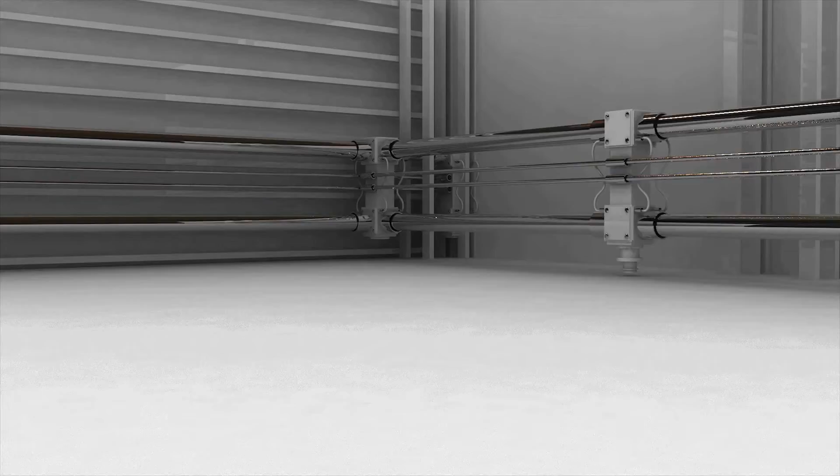So today we're going to be doing a very simple video on how you can do a beautiful detailed 3D carve. We're going to be covering the absolute basics that you need to do a wonderful 3D carving on some nice hardwood. We're going to keep this video pretty short and sweet. For most of you, this is going to be probably your first 3D carve, and this video is targeted towards people thinking about doing one for the first time. We're going to show you just how easy it is.

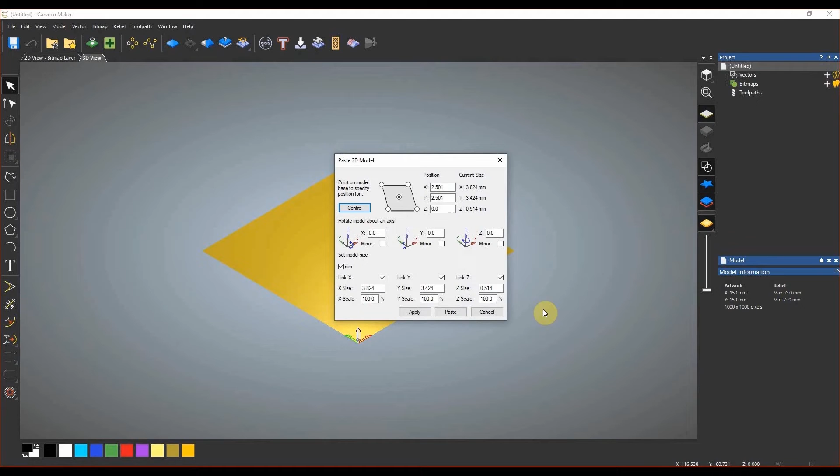Now in this first window that's popped up, as you can see on the left hand side, we don't have anything showing right now. So the first thing we need to do is get our model up to the surface, and set it to the size that we want it to be. By default on the right hand side, our X size is 3.8 mil, our Y is 3.4, and our height is 0.5 mil. So this is tiny. Let's just go ahead and make this 120, which has now automatically changed the Y and the Z to keep the scale.

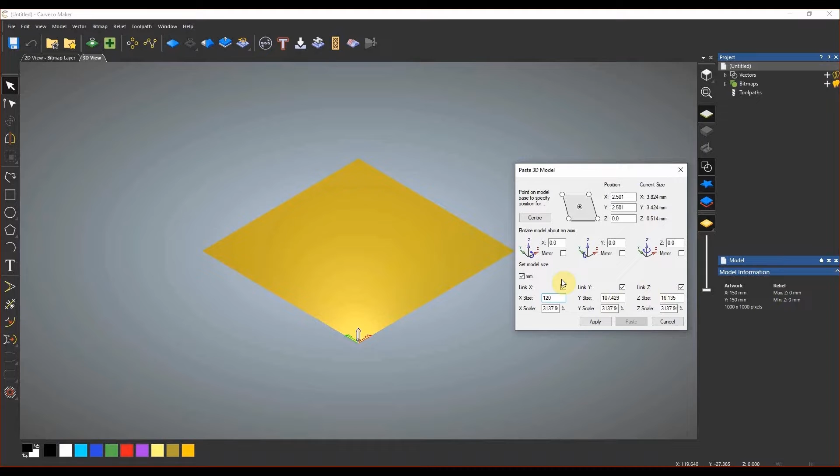So if we hit Apply now, you can see that our model is way below our canvas here. So we want to get it up on top on the surface. Let's just hit this center button, and then hit it again just to make sure it's going to go right on the surface.

Now if we wanted to, we could go ahead and do this 3D carve immediately just as it is. But instead, just to save a bit of time for the purposes of this video, we're going to decrease the height of this model a little bit, but still keep the overall dimensions. Carveco will actually squash this down for you, and the easiest way to do it is on the right hand side here, you've got this Link Z checkbox. We're just going to uncheck that, and reduce this down to 10 millimeters, just so it's a little bit more stout than it was originally.

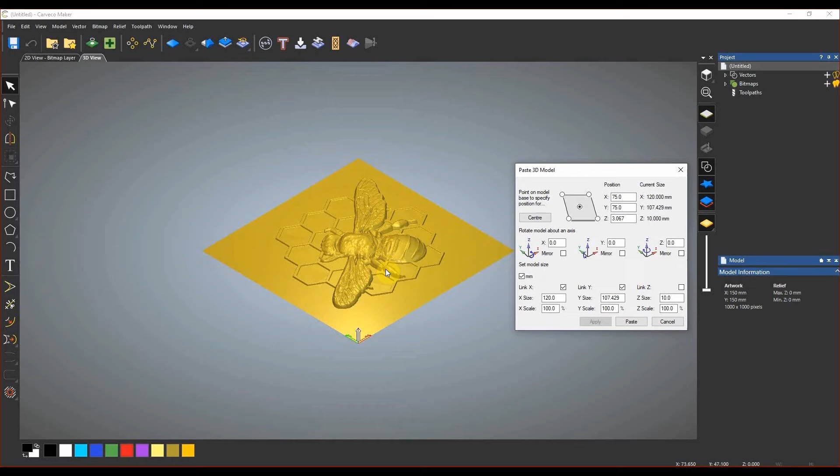Let's hit Apply, and as you can see, it's squashed down our overall STL. This is going to make for a much faster carve for the purposes of this video. So let's just hit the center button again just to make sure it's sitting right on top. Now that we're happy with this, just hit the Paste button here. Now if we close out of this window, we can see that we have our beautiful QueenBee model here on our canvas.

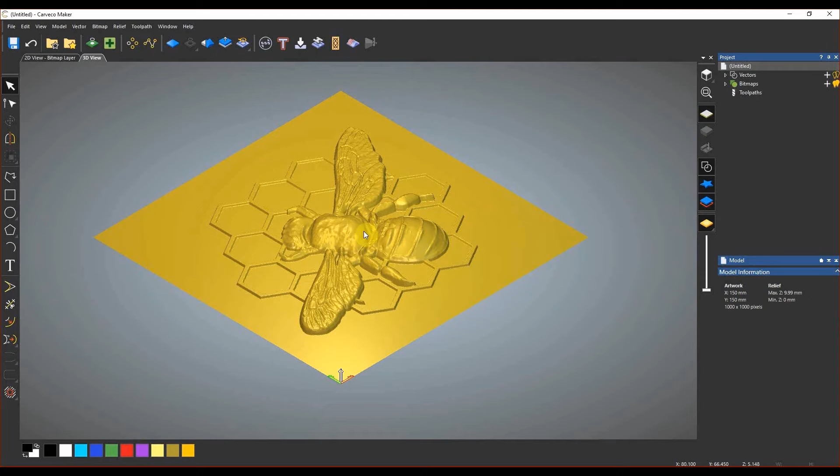Now just some quick navigation tips with Carveco. If you hold the mouse wheel in and move the mouse, you can rotate the model. If you hold the shift key while holding the mouse wheel in, you can actually drag the whole model around. And of course you can roll the mouse wheel to zoom in and out of the model.

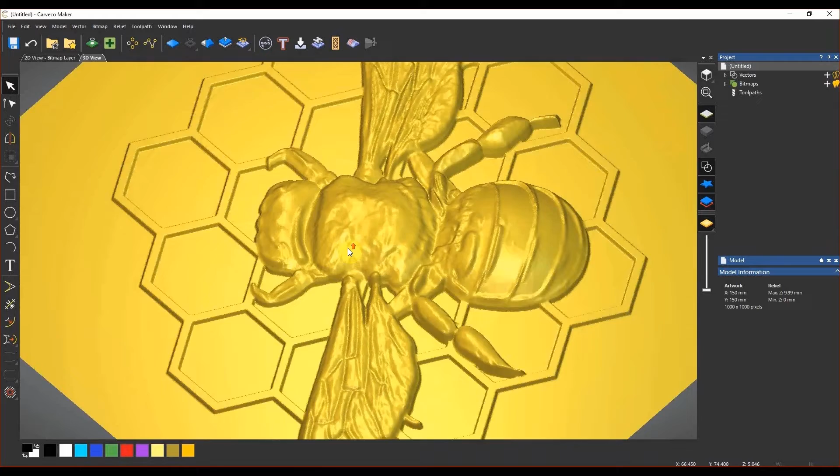So let's just go straight in and start doing this 3D carve. Now traditionally 3D carves are usually a two-step process. The first thing you would normally do is a roughing pass, and then the next step is to do a finishing pass where you use a really fine tool to get all of that beautiful detail out of your model.

So we're going to jump straight in now and set up our roughing pass. But what we're going to do, which is a little bit different, is create a little boundary around our model just so it really stands out when we go to do this carving. So the first thing we need to do is create a vector which will go around our 3D model. To do that, we go up the top to Vector, then Create, then Relief Boundary, and just hit Create Boundary on the right here.

Now you can see we've got this pink line traveling all the way around our model. So we are going to use this particular pink vector for our finishing pass. But now what we want to do is create a separate vector which we're going to use for our roughing pass, which is going to give us a little bit of a 5mm standoff from our actual carving and really make it stand out a lot more when we go to carve this.

So to do this now, we're going to keep this vector selected so it's still in pink, and go up the top to Vector again and then down to Offset. If we have a look on the right hand side here, it's opened up this window. Now we've already got an offset distance of 5mm in here, so we're going to keep this at 5mm and make sure we select outwards/right, and in here just hit Offset. As you can see now, it's created another pink vector that's traveling 5mm all the way around our actual model, and that is going to be a nice flat bottom that's going to accentuate our 3D model on our timber. So now that we've done that, we can close out of this window here.

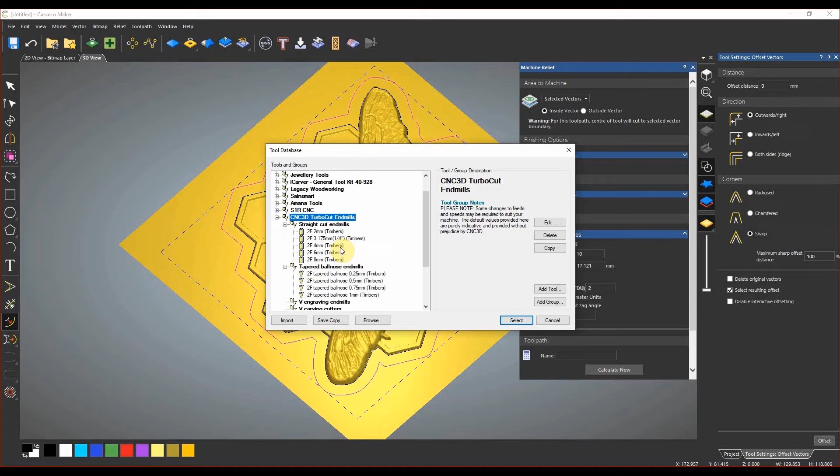So for this roughing pass, we're going to use a much larger end mill to remove the bulk of our material. We're going to use a 2-flute straight cut with 4mm cutting diameter, and you can leave the default settings of this for hardwood if you're using one of our QueenBee CNCs. We have tried our best to put some good feeds and speeds in there to make sure you guys have great carves.

If you are using, say for example, one of our U-carve CNCs, you may want to look at changing some of these values to decrease your depth of cut or width of cut. That will suit the U-carve a little bit better. But you can definitely do this on one of our U-carves too, it's just going to take you a little bit longer.

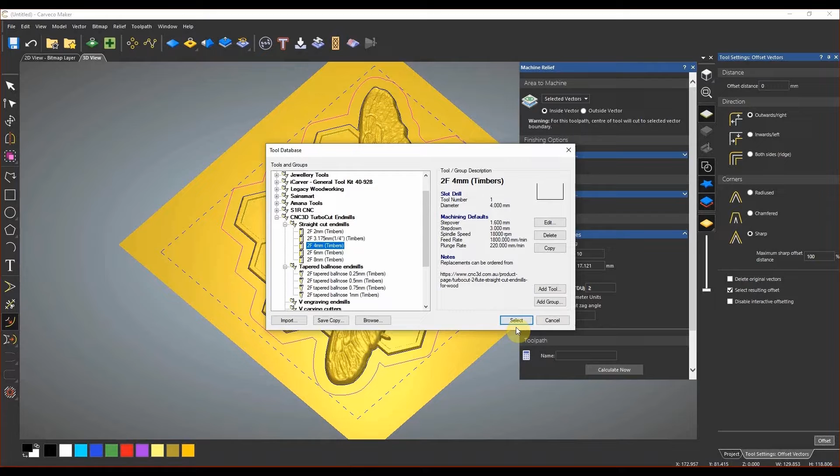So now that we've gone ahead and selected our 2-flute straight cut 4mm, just hit select. And if you look down here, you can see it's got a couple of default options that it wants to run through.

We're going to leave the standard raster here as our tool clearance strategy. We're going to let it automatically do our Z slices, and we are going to select ramping. You may not have this option ticked right now, but we're going to choose to add ramping because it leaves a better finish on your material as opposed to just plunging straight down into it. So leave that selected, and we're going to leave all the default settings that Carveco has selected. We're also going to leave our safe Z with what Carveco thinks is correct.

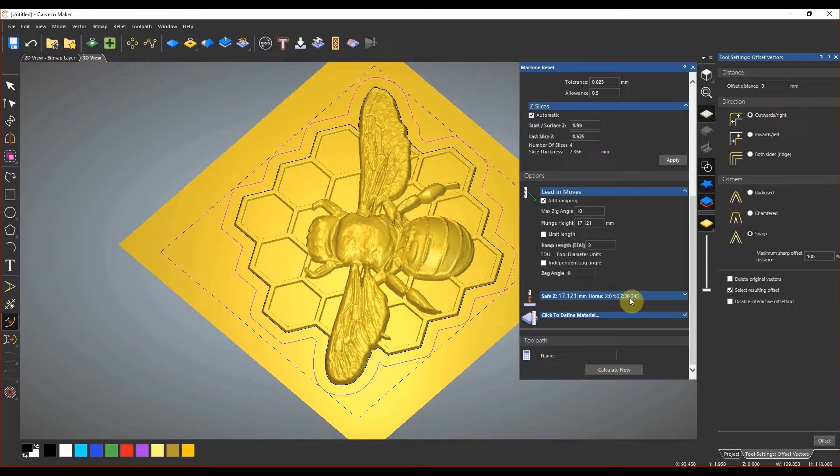The only other thing to do now is basically just to define our material. So let's click on this blue section, and as you can see, it has determined that the material thickness is 9.99 mil. Now this specifically relates to our 3D carving in general, but we actually want to tell it that we're using some 35 mil Australian hardwood here. So let's put 35 mil into this box.

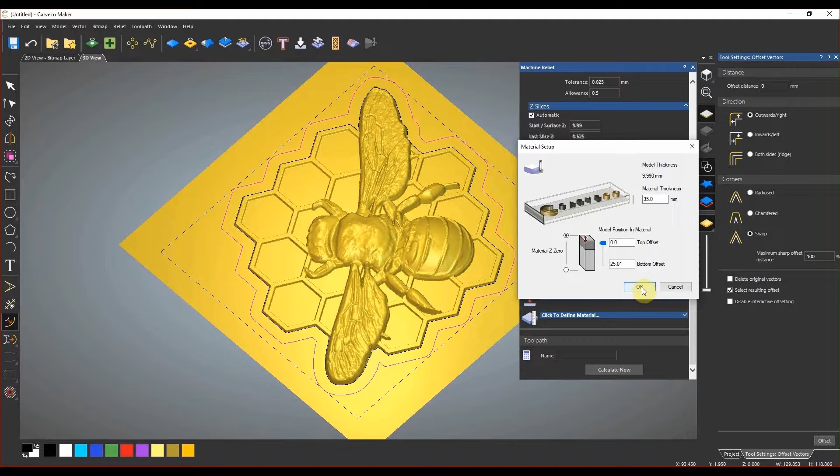Now, by default, it wants to set the model position right on the surface of the material, and we actually want that to happen because we don't want it to have to go all the way through this top section before it starts working on our model. So let's just bring our model all the way to the top, which is the default option, and click OK. Now, if we hold our mouse wheel down, we can see our material and where it's planning on putting our actual carving.

So now that we've gone ahead and done that, let's give this a name. We're going to call this roughing Bee. And let's just hit calculate now. And there you have it, it's created our toolpath that it's going to run for this 3D carve.

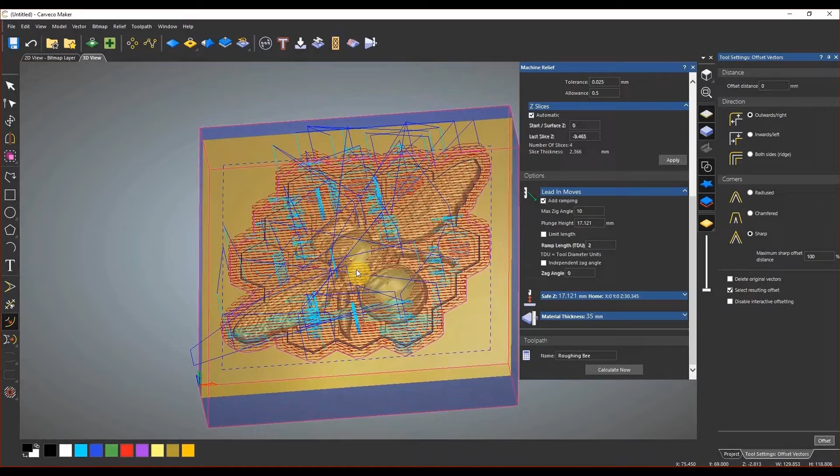So now we are basically just going to go to the right here where we've got our project tab, or we can choose to close out of this offset vectors window. So we'll close that. And if we now expand our toolpaths option here, you can see that we have our roughing Bee toolpath that we've just created.

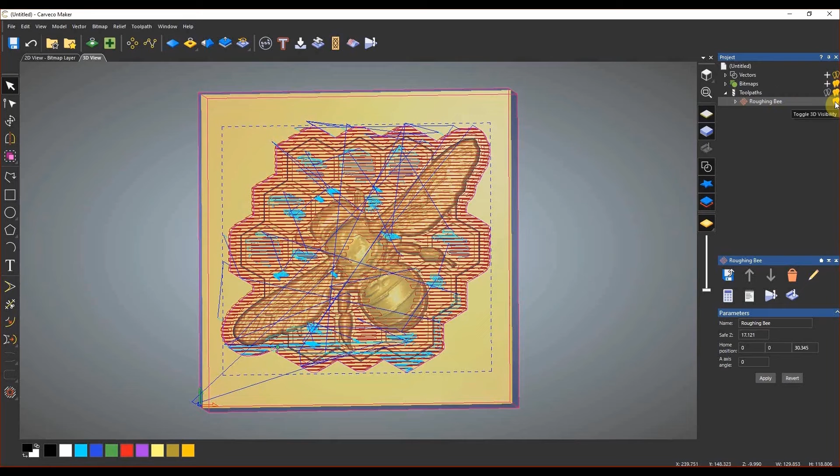So the next step from here is we're just going to close out of this machine relief window. And on the right hand side here, next to where we see roughing Bee, you'll see we've got these yellow lights. What we're going to do is just click on that, and that will actually hide our toolpath on the left hand side. If you click it again, then it will show the toolpath. So we're just going to hide that for a second.

Now, we've basically set up our roughing pass at this point in time, so it's pretty much good to go. The next step from here is we're going to now create another toolpath, which is just going to be for the finishing pass of our model. So what we need to do is just select our inner vector so that it's highlighted in pink. And we're basically going to follow the same procedure.

So we're going to go up the top to toolpath, and then go to new 3D toolpath, and then go to machine relief. And now what we want to do is we just want to add our finishing option. The first thing, of course, is we're just going to select selected vectors from this list to make sure it's only going to look at the actual model from within this pink boundary around our carving. So now all we need to do is choose a suitable end mill for doing a carve. Now, some of the best end mills to use are tapered ball nose end mills.

They will give you the best results when you're doing really detailed 3D carvings. Today we're going to be using a 0.5 mil 2-flute tapered ball nose end mill, so the very tip of this end mill is only 0.5 mil wide. By default, we set ours to have a 7% step over, meaning it will only travel over from the previous cut by 7%. This should give us quite a nice finish, but will add a little bit more time to our carving.

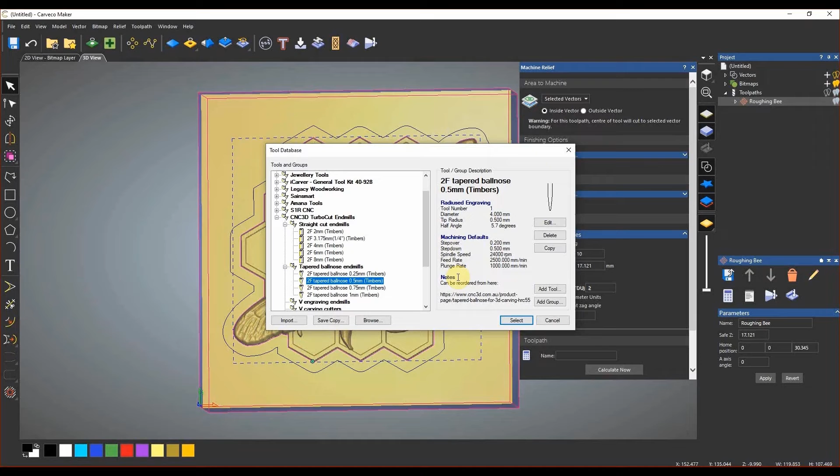But let's just select this one here. Now what we want to do is pretty much leave all of these settings exactly the same as before. So all we really need to do now is go down here, and let's call this finishing Bee, and then hit calculate now.

And there we go. It says 1 plunge could not be ramped. Do you still want to ramp this toolpath? This is entirely up to you if you wish to do this. As you can see based on the picture, it's pretty much going to do the whole thing for us, except for these 2 little areas here.

Now, we're going to say no to this in this case, and we're going to deselect ramping for the purposes of this actual carve. The reason why is we don't want it to miss any little bits and pieces as it goes through this carve. So in this case where it's given us this alert, let's just untick add ramping and hit calculate now. And so now that's gone through and it's accepted that one.

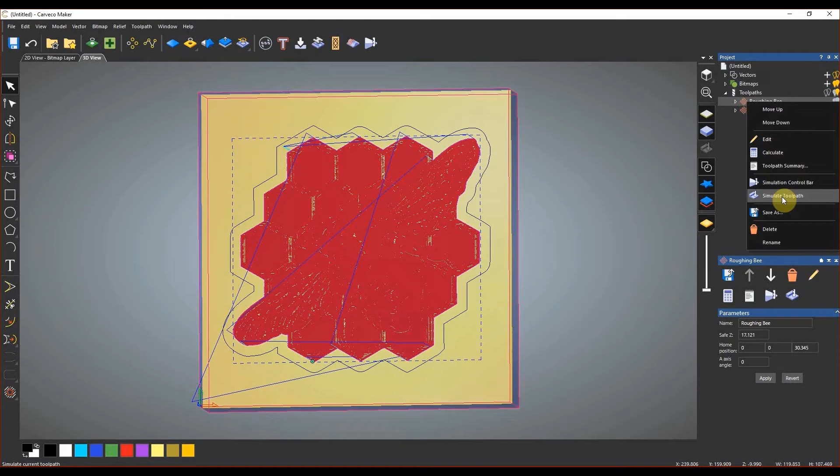Now if we look on the right hand side, we can now see our finishing bee toolpath here. If you want to, you can actually go and view these as well. The best way to do that, for example with our roughing bee, we'll have a look at that one first. So if we right click on roughing bee, we can go to simulate toolpath. And if you have a look here, it's given us a visual representation of how our actual carve will look after it completes the roughing pass.

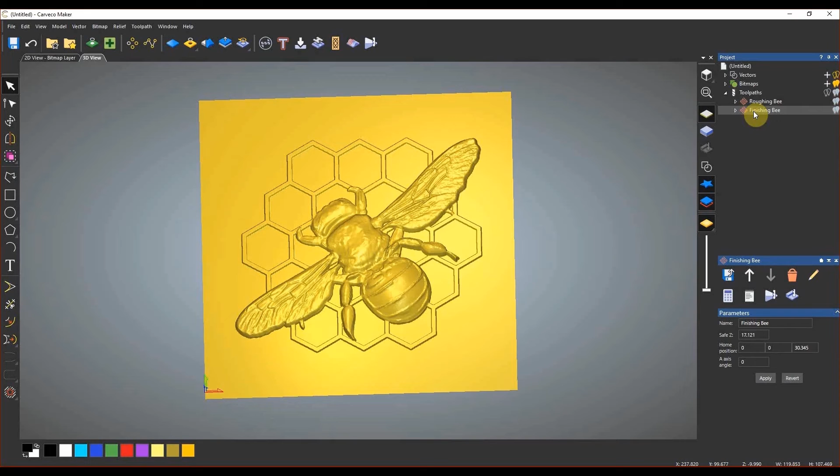Now, if you want to do the same thing with the finishing pass, it works the same way. We're just going to right click on this simulation and go delete. Then we're going to right click on our finishing bee toolpath here and just go simulate. And if you have a look now, that definitely looks a lot more like our 3D carving and what we would expect it to come out like. So it's looking pretty good. We're pretty much ready to go ahead and export these now and get them loaded onto our Nighthawk.

So the first thing we'll do is export our roughing bee toolpath. We're going to right click on it and go save as. As you can see here on the right hand side, it says toolpaths to save. There's our roughing bee. We're going to save it in this folder, which is C users David OneDrive desktop Bee, and we're going to call it roughing bee.

Now for the machine file format, if you're using a CNC3D Nighthawk controller, we definitely recommend selecting this CNC3D Nighthawk post-processor. This one will be available in the next release of Carveco, but we'll also include a link where you can download it off our website. In the meantime, you will notice there are two different CNC3D Nighthawk post-processors. One says CNC3D Nighthawk millimeters, the other says CNC3D Nighthawk spindle millimeters, and the only difference between these two is if your spindle is being controlled by your Nighthawk, you would definitely choose this CNC3D Nighthawk spindle option.

But today our particular Nighthawk is not controlling our spindle, so we're going to get it up to speed manually and then tell the job to start. But if you do have your spindle being controlled by your Nighthawk, definitely choose this option. It will add a 10-second delay after turning the spindle on, just to give it time to get up to speed before it tries to plunge into your material. So for the purposes of this video, just choose the CNC3D Nighthawk millimeters and hit save.

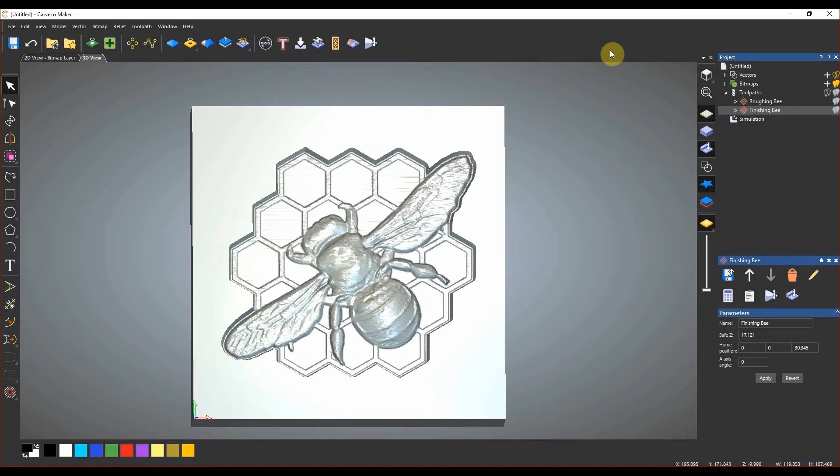And again, we're just going to make sure that we have our CNC3D Nighthawk millimeters post-processor selected and just hit save. Now we're pretty much good to go at this point in time. You could choose to close out of Carveco if you wanted to. So let's just minimize that for now.

Alright, so now let's just go ahead and launch our CNC3D Commander software. And guys, if you do get this message appear, please say yes for us. It definitely does help us out to try to get this fully approved by Microsoft. It is digitally signed by us at CNC3D, so please say yes.

It'll help us out greatly when you're launching Commander. And once Commander loads, first thing that we're going to do, we're going to connect up to our Nighthawk CNC controller, which is on our network. So let's just change to IP. We've already got the details loaded in here, so let's just hit connect.

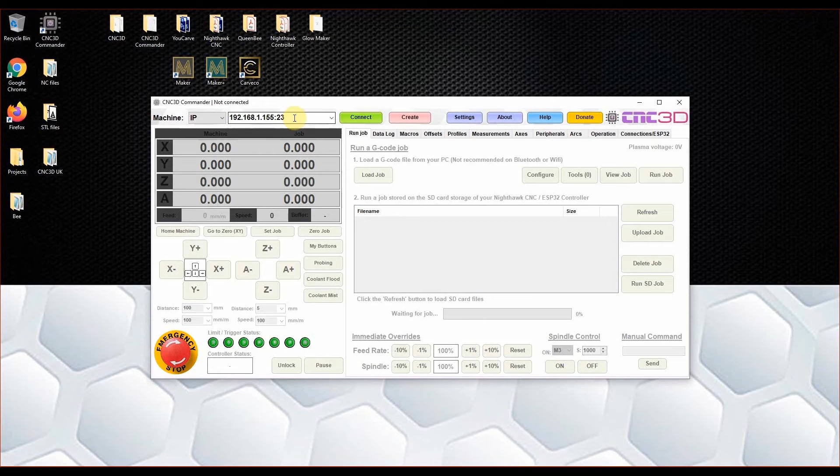Alright, so now we're on our main Nighthawk controller here. Let's just hit refresh to see the files that are on there. And the first thing that we're going to do, we're just going to upload these files that we've just created. So let's just hit upload job. Now you have to do one at a time, so let's do roughing bee first and hit open.

And once this completes uploading, let's just go through and load on our finishing toolpath as well. So we'll hit upload job and choose finishing bee and go open. And perfect, so now if we have a look, we have both of the files loaded onto the SD card of our Nighthawk. So let's just go ahead and go into the workshop, and we're going to start carving this job.

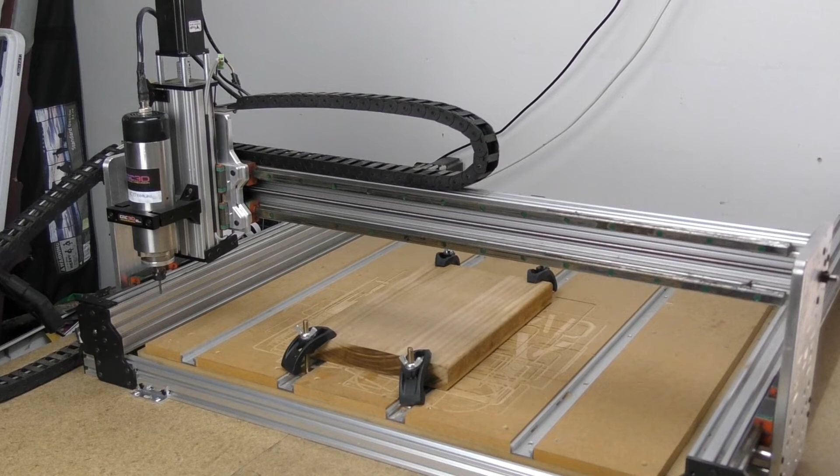Okay, so here we are. We've just gone through. We've inserted our roughing pass end mill into our spindle. Now the first thing that we need to do with the Nighthawk, because we've just turned it on for the start of the day, is we're just going to access the interface for the Nighthawk, 192.168.1.155.

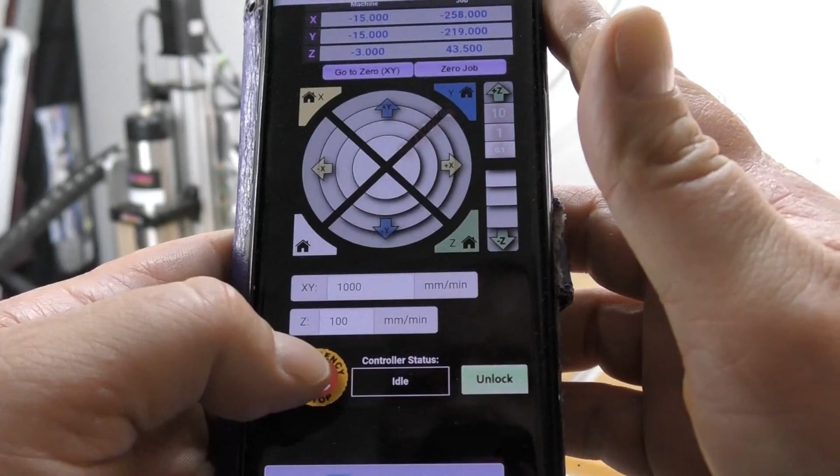Perfect, we're just in an alarm. Let's just clear that to go back to normal. And let's just go ahead. First thing is we just have to go and home our machine.

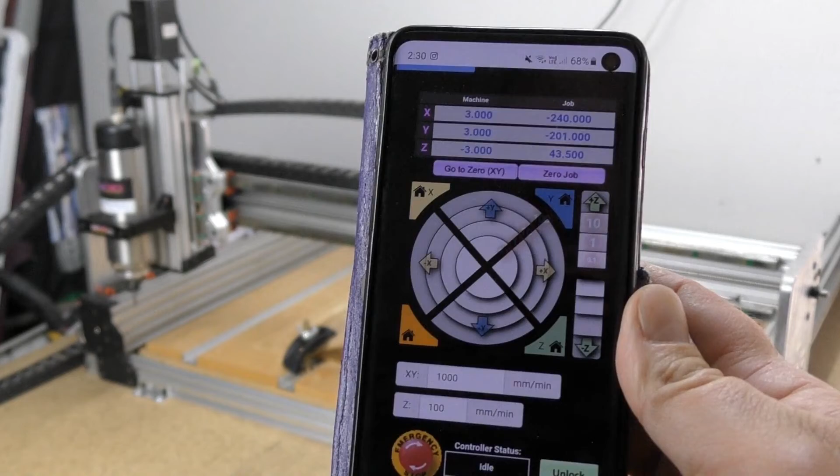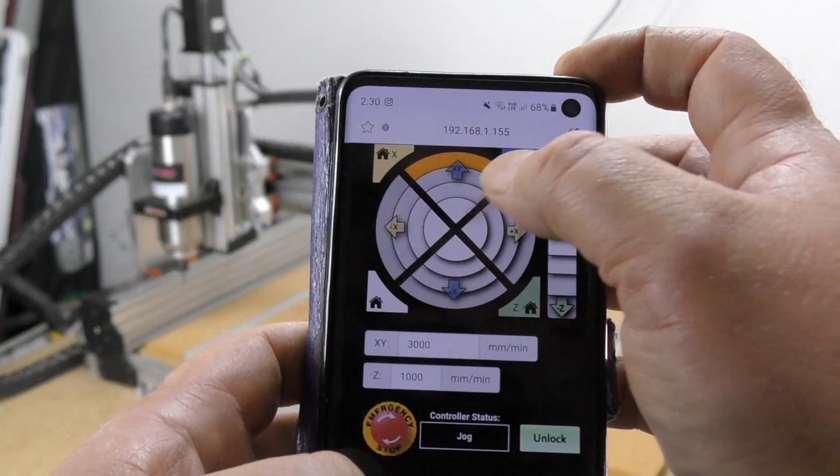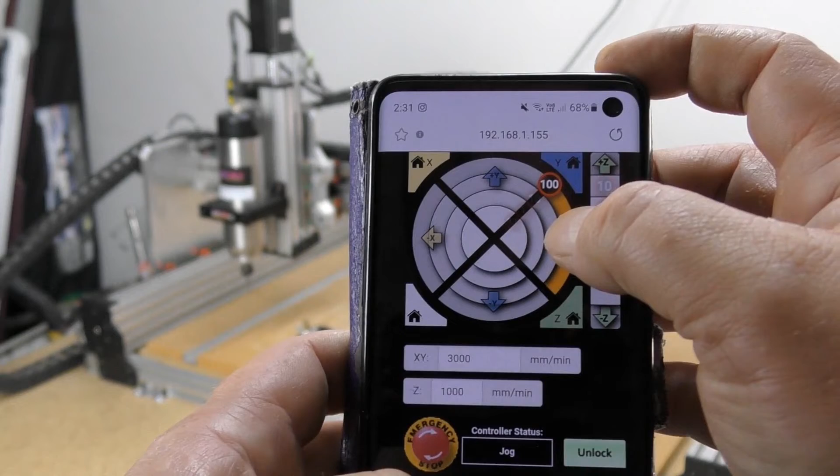Okay, perfect. So now that we've homed our machine, all we need to do, let's just speed up these jogging functions a little bit here. Let's go 3000 millimeters per minute for X and Y, 1000 for Z. Let's just go and clear our clamps here. And let's take that across 100 mil. And another 100 mil. And let's go 10 mil.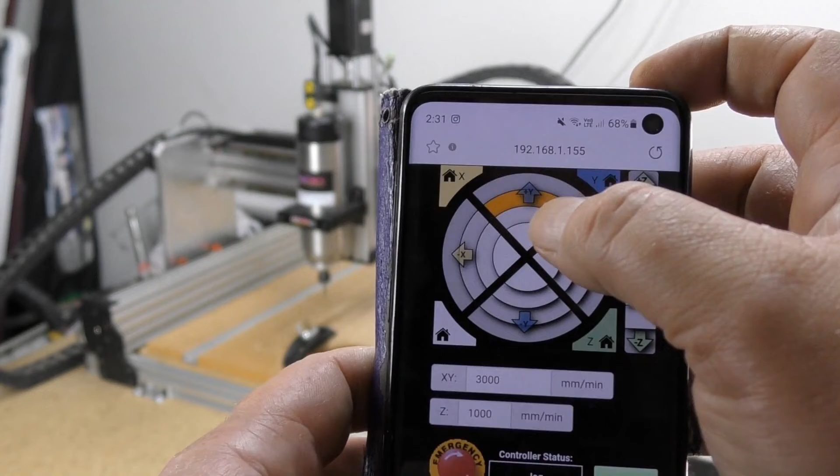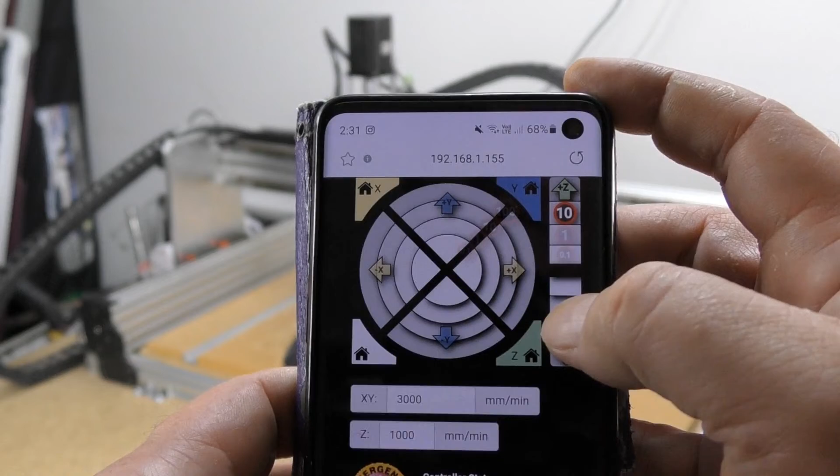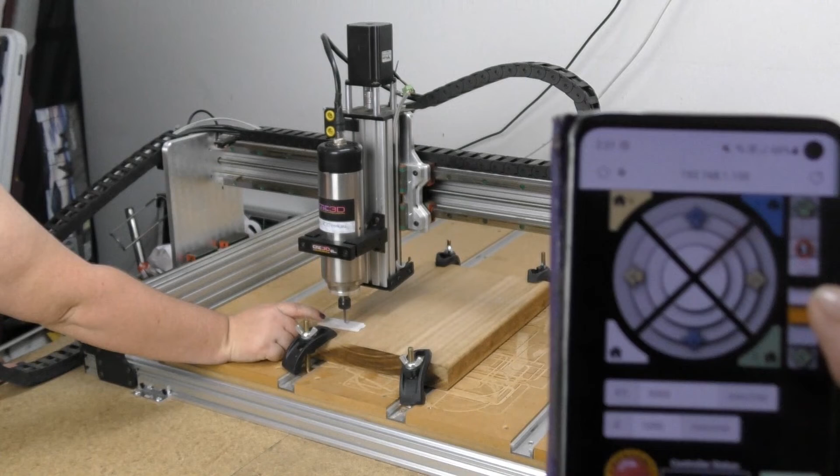Okay, that's looking like a pretty good spot. Let's just start to lower down our Z. And now we're getting close. Let's get our paper underneath there. And let's just nudge this down a little bit until we start getting close.

Okay. Up a bit, alright let's go up. A bit more. So we're going to go up 0.1 of a mil. Yeah, down one maybe, down 1 mil, 0.1 of a mil. Right, perfect, we are on the surface of our material.

So now we're pretty much good to go. All we need to do now is to fire up our spindle.

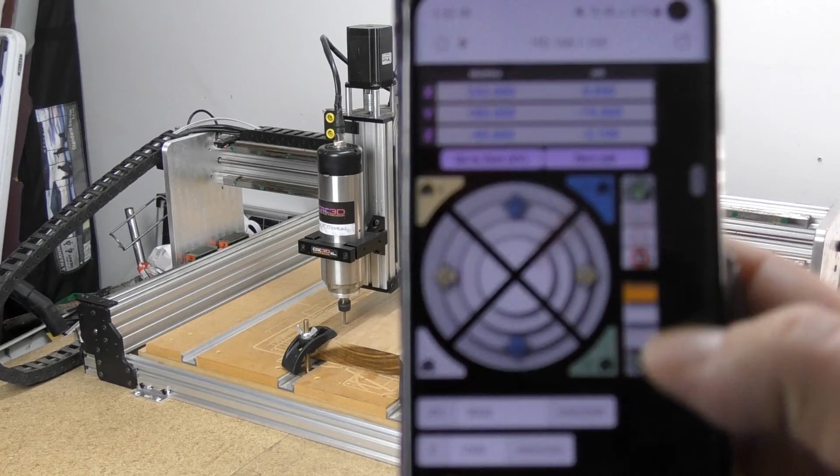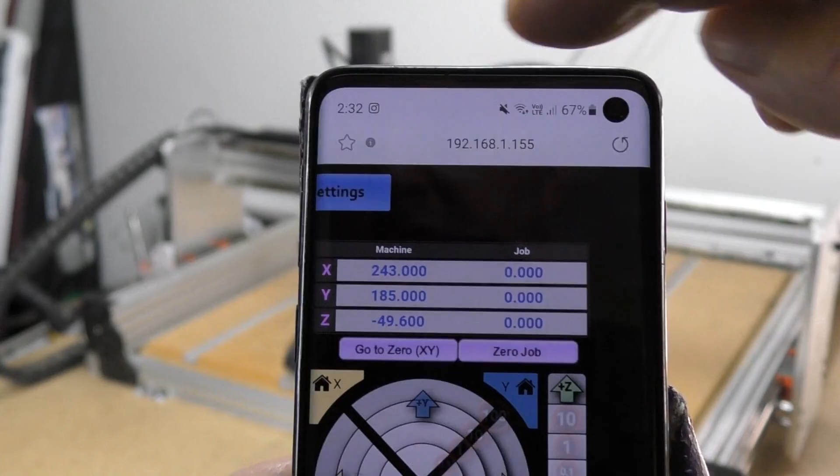Now the most important thing to do here is we just need to go back up the top here. Now that we're in our 0 position, we do need to make sure that we hit 0 job, and we have to make sure that these job coordinates are definitely set to 0. We don't need to worry about the machine coordinates and what they're doing. This is the most important thing.

So now that we're at 0, we're just going to wait for our spindle to get up to speed, and then we should be good to go. So let's just prepare for that.

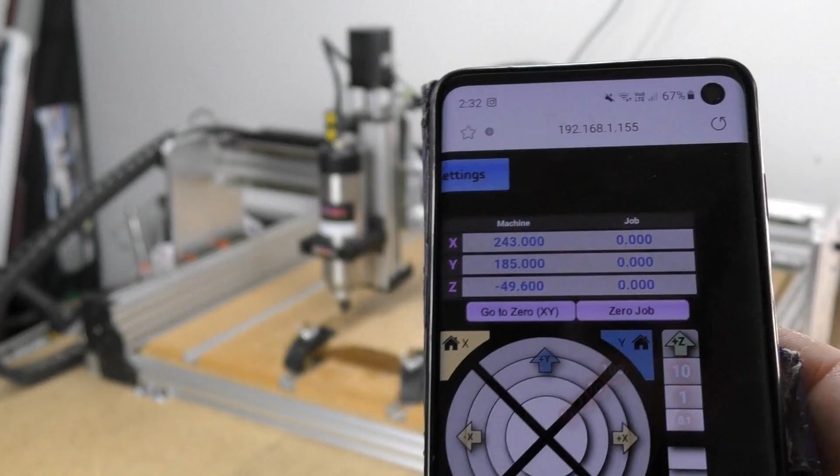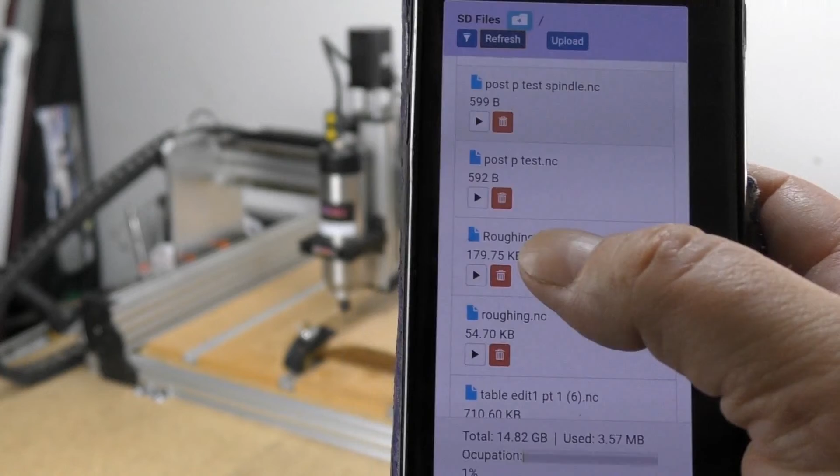So if we scroll down here a little bit further, this is where we're going to have our list of files. We'll just hit refresh, and we'll scroll down a little bit here, and we're looking for our roughing pass in here. So there's our roughing B file. So our spindle's almost there, and now we're good to go. So let's just hit play on roughing B.

So what's happened now is our job has successfully completed our roughing pass. It's now returned back to the 0 position. So what we're going to do now is we are going to put in our tapered ball nose end mill for the next part of this 3D carve.

Alright, let's go ahead and do that. So here we have our turbo cut tapered ball nose end mill. It's a 0.5 mil, it's 15 degrees, and it's got a 4 mil shank. So let's put this straight in here.

Alright, so the first thing we need to do is we need to put in our new cutting tool that we're going to be using. So, our spanners over here, let's get this first one on. Okay. And now we should be able to slide in our new cutter. Perfect.

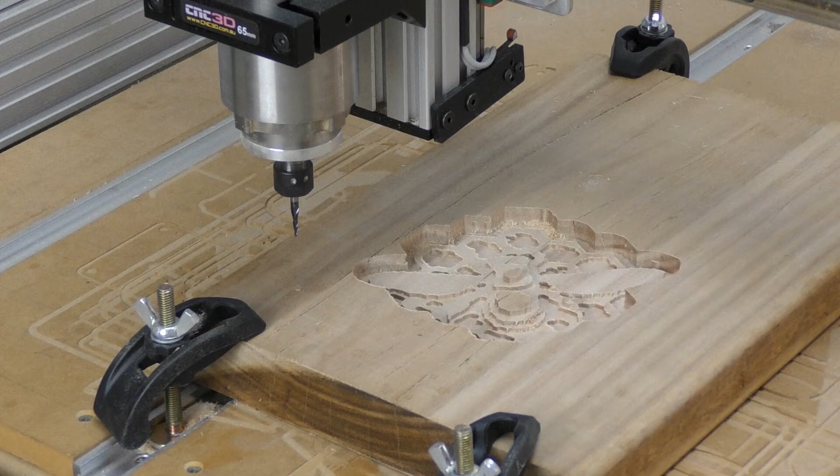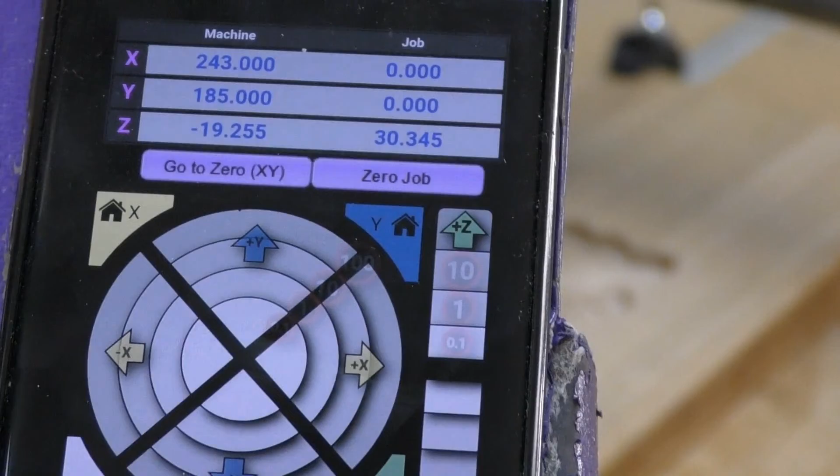Okay, so when that roughing pass completed, it's now moved our bit in the exact same XY position that we started in, but it's given us a little bit of an offset here. So what that is, we'll just have a close look and see what it's done. So it has set our Z to 30 point, let me have a look here, 30.345. So we know that from where the old bit was, that's where the bottom was.

Now, this is no longer relevant in this case because we can't guarantee exactly how high we've put our new tool in. So if we go back over here and take a look, what we need to do now is the same thing. We're just going to lower down our Z until we get to the right distance.

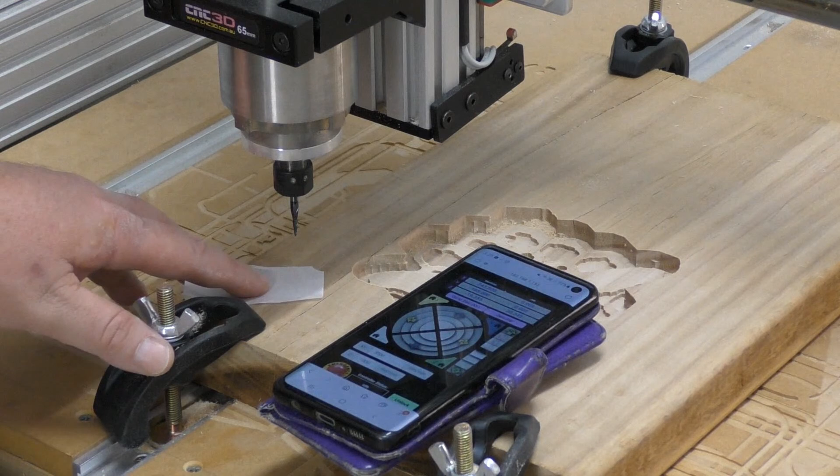Let's put this here, if we can, for the video. Whoops, we'll put it up here. Alright, so what we want to do now is we want to basically jog our Z down until it touches in the exact same position that the original one did.

So we know we're 10 mil off. Let's go down 10. And again, let's zoom in here a bit, make this a bit easier. So let's go now 1, 2, 3. That's feeling pretty close, let's go 0.1, 0.1, 0.1.

Alright, and that's grabbing. So that is now our new 0 position that we're going to start the next half of this job from. Alright, so what we want to do now is we want to try to zero these job coordinates out quite well.

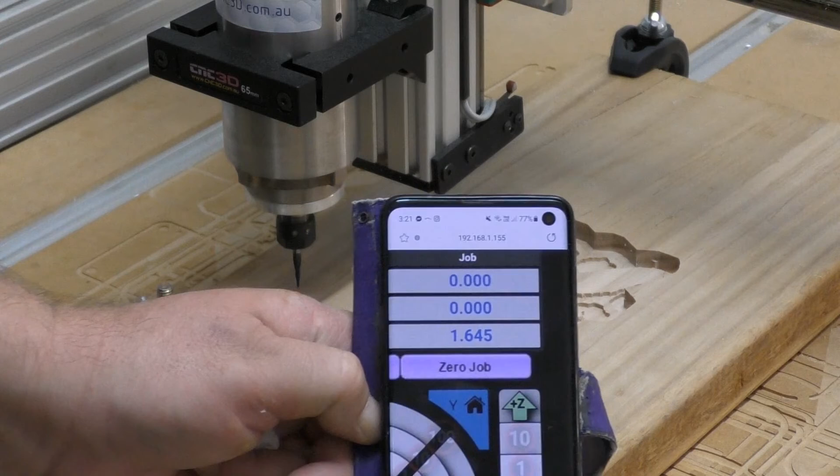So at the moment, as you can see, it was 1.6 mil the difference. Let's just hit 0 job. Now what we're going to do is we're just going to start up our spindle and then we're going to run our finishing pass. So let's do that now.

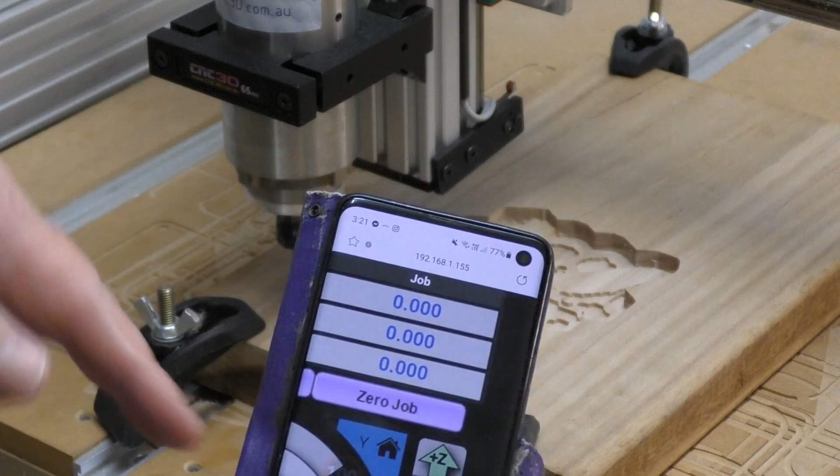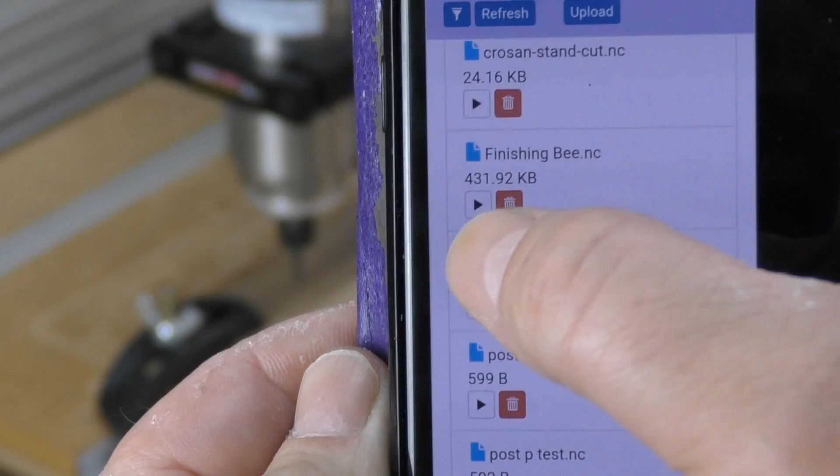So now that we're up to speed, let's just hop back over to our phone here, and we've already set our job coordinates to 0, so we know we're good to go. Let's just have a look here. We're looking for Finishing Bee, there it is. So all we need to do now is just hit play.

And so that's it, guys. Let's see what we've done here now. We're just going to grab our vacuum cleaner and tidy this up a little bit. Let's just jog this out of the way.

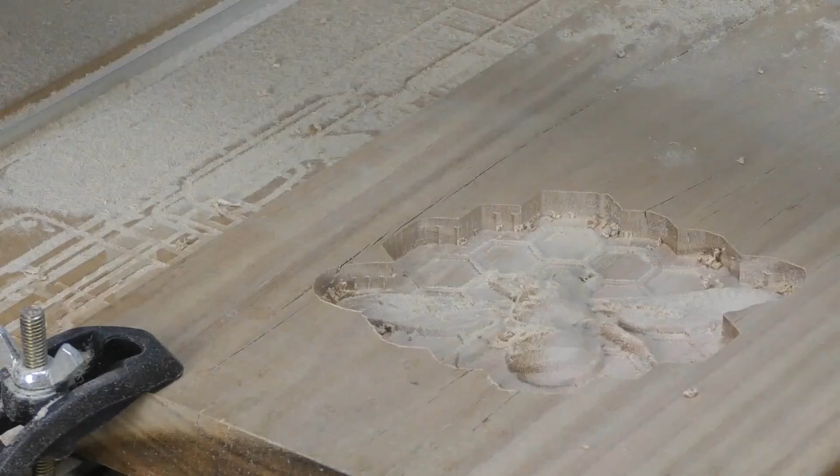Alright, so let's take a closer look at what we have here. And there we have it, guys. With a little bit of sanding and tidy up, this thing will look absolutely beautiful.

But not a bad effort here. A little bit of fluffing, that's all we really need to fix up. Other than that, a beautiful 3D carve, some nice solid timber. There you go, guys.

Okay, so as you can see, our 3D carving is now completed. It's looking good. Now the time's come for us just to go and give this a bit of a tidy up. So what we're going to use is one of these bristled brushes. Now this one's quite soft, but you can use some that are a bit more abrasive.

And what we're going to do is we're just going to rub our carve and get in all of those nooks and crannies. And let's see if we can get rid of some of this excess sawdust build-up that's in all of these tight areas where there's a lot of detail on our carve. And we'll just come along and loosen all of that up.